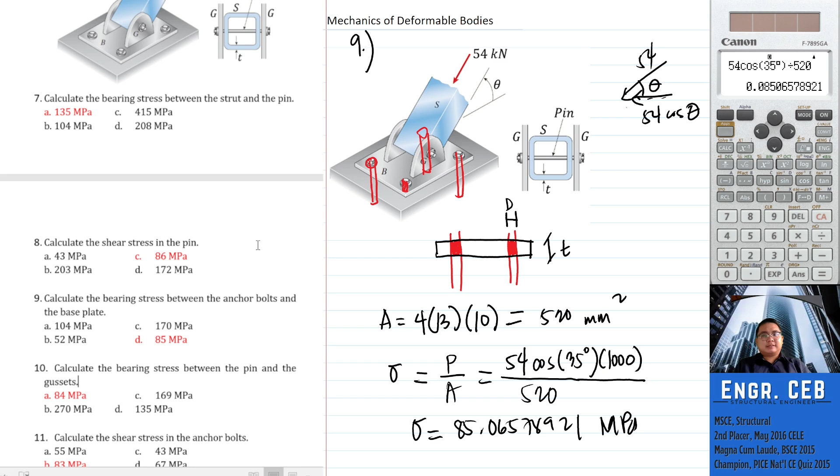Number 10, calculate the bearing stress between the pin and the gussets. So for the pin and the gussets, it's similar to what we did earlier, but this time it's the gussets. Earlier, the area we considered was for the strut, because the question was about bearing stress between the strut and the pin, so we computed the strut. This time, the question is about the gusset.

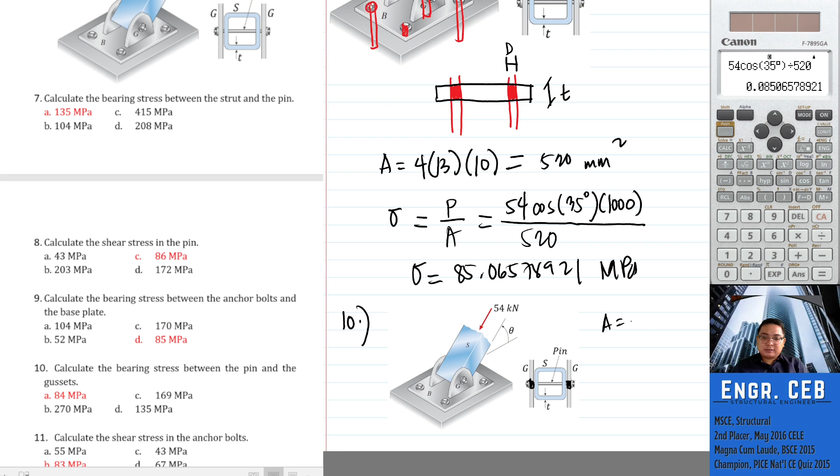That's for the gusset. Okay, so let's just compute the area. There are two. Diameter of the pin is 20. Diameter of the pin is 20 and the thickness of the gusset is 16. So only the area will change: 2 times 20 times 16, that is 640.

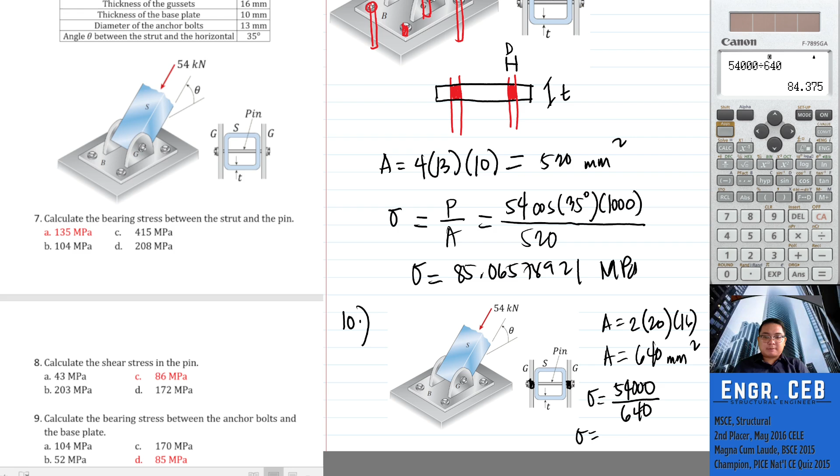Bearing stress, that is 54,000 newtons. Just divide by the area, 640. Therefore, the bearing stress between the pin and the gusset is 84.375. Okay, so that is letter A.

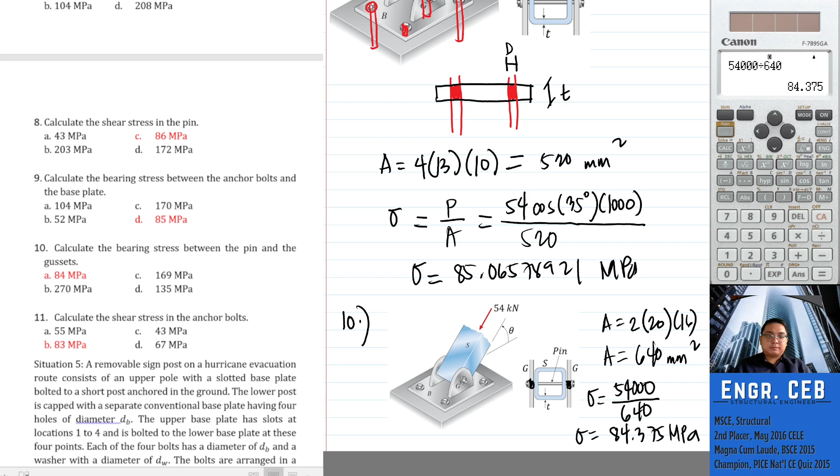Next, calculate the shear stress in the anchor bolts. Of course, the anchor bolts can also experience shear. The failure of the anchor bolts could be bearing on the plate, or the anchor bolt could be cut off. So, the shearing stress in the anchor bolts is simply V over A. Take note, the force we'll use is just the horizontal component, because that's the only one that shears our anchor bolts.

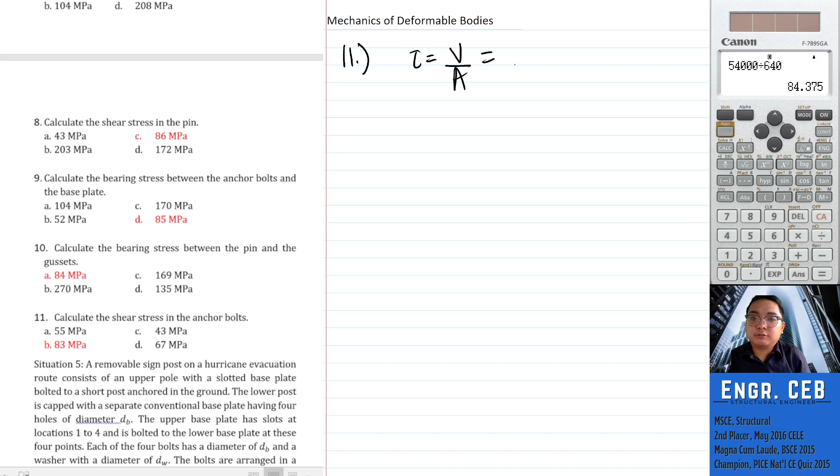54,000 cosine 35 degrees, then divide by the area of the anchor bolts. We have four anchor bolts, four in single shear.

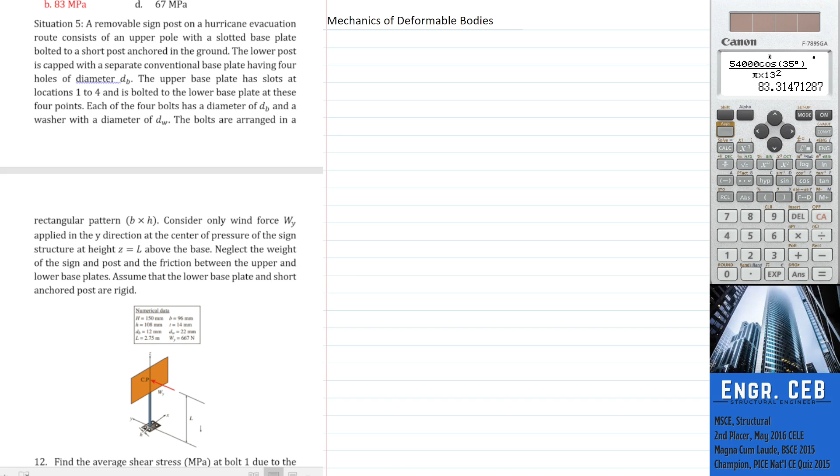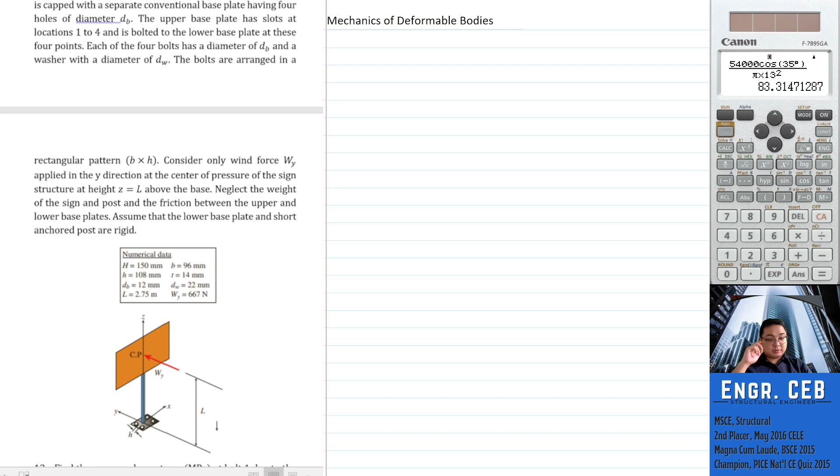So we have here a removable signpost. I won't read it all out, but this is the point of application of the force - it hits the sign, and forces develop on our bolts. So the question is, find the average shear stress at bolt 1 due to the wind force W sub Y. This is the configuration of the bolts.

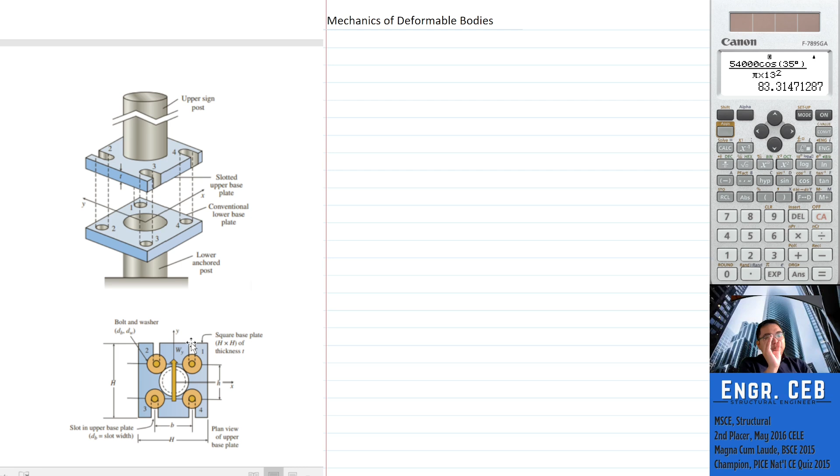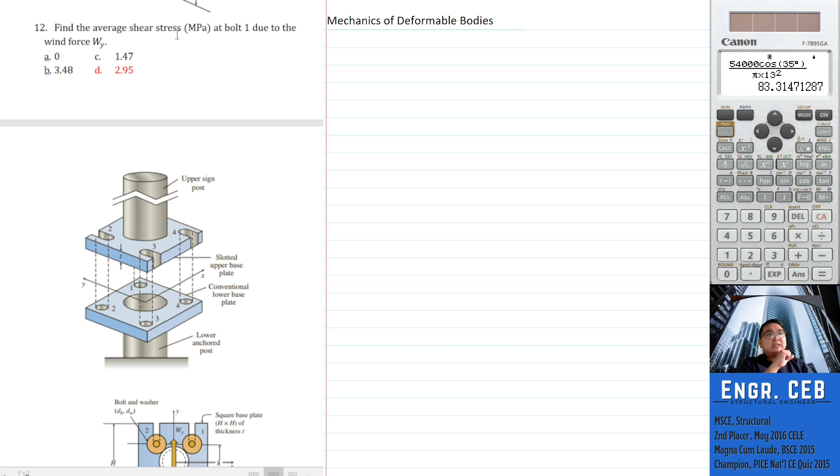So the question for the first part: find the average shear stress at bolt 1. This is the application of the load, W. So when the load is applied like this, the tendency is - because the wind load is directed along the positive axis - only two bolts will resist the load, bolts 1 and 2. Why?

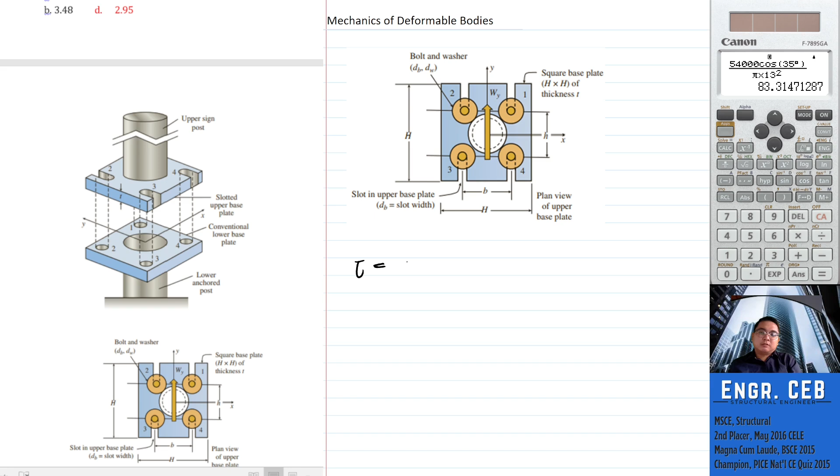Okay, so let's compute the shear stress. Our force is W sub Y, divided by the area. Take note, we said bolts 1 and 2 resist the force.

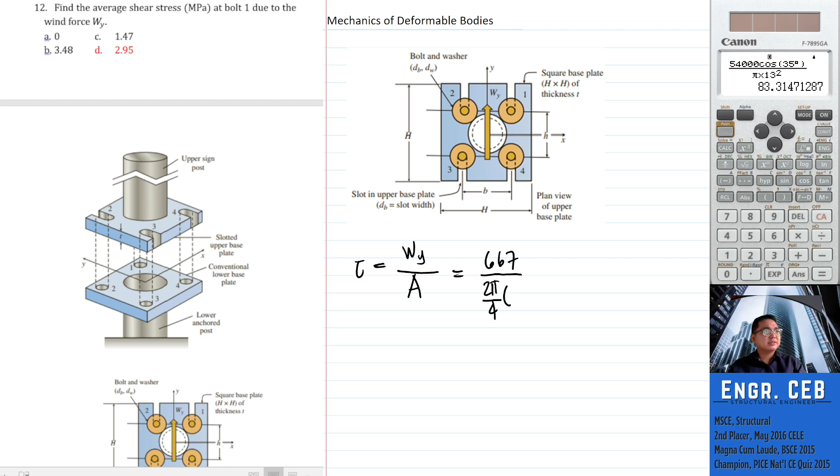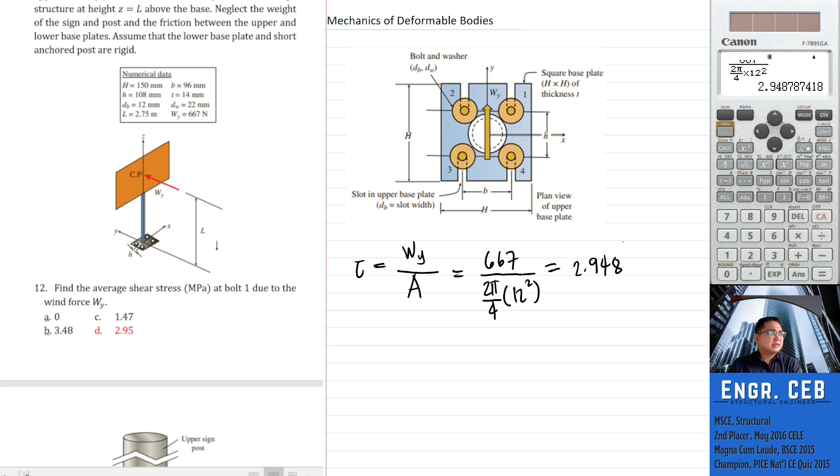So if we want to compute the shear stress at bolt 1, that is 667 Newton - this is the value of W sub Y - divided by two areas, since bolt 1 and 2 share the load. That's 2 times pi over 4 times the diameter of the bolt, which based on the problem is 12. That gives us 2.948... 7.418 megapascals. Okay, so that's our shear stress at bolt 1.

Next - find the average shear stress at bolt 4 due to the wind force W sub Y. So, number 13 - this was number 12, now number 13.